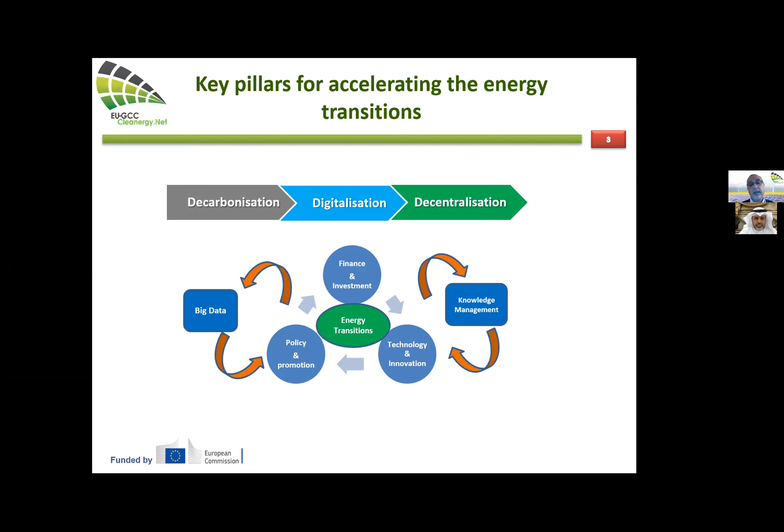On top of this, we have also to tackle the issue of data, the availability of data, and we are handling a lot of data coming from our projects, or all the facilities in energy and other sectors. Knowledge management is key also, as we have to learn and take note of all the changes, all the experiences, the failures and successes, and this is very important for the next generation.

For this energy transition, we need to also work on all the sectors of the economy, not only the power sector. So we have also the other sectors like transport, building, and industry that are consuming energy. And if we need to go with 100% renewables, we have to also transform that energy into clean energy.

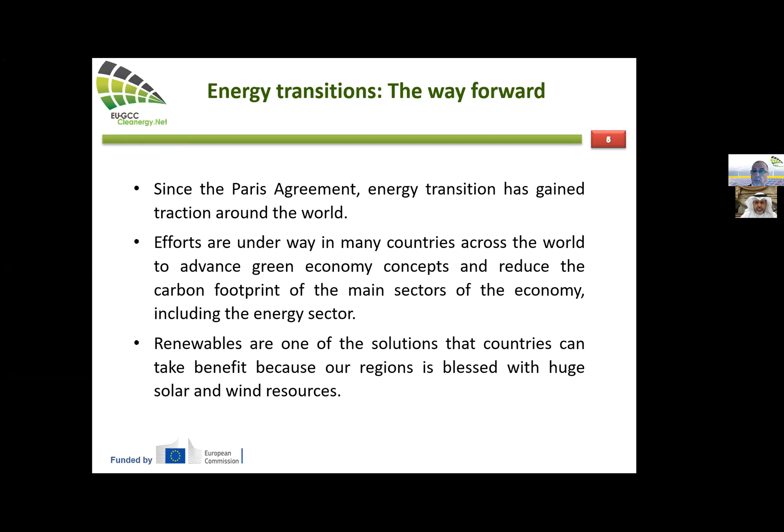So since the Paris Agreement, energy transitions have gained traction around the world. Efforts are underway in many countries in our MENA region, but also in Europe, in America, in Asia, to advance green economy, green concepts, and reduce the carbon footprint for the main sectors of the economy, including the energy or power sector.

Renewables are now one of the solutions that countries can take benefit from, because I'm sure that in any country or region, we can find solar energy, wind, or other renewable resources like geothermal or even waste.

Yes, but where we are now, in 2018, the fuel shares in the world total energy supply were dominated by fossil fuels, by oil, coal, and natural gas. Renewables, the share of renewables was 13.5%, including hydro, biofuels, waste, and unfortunately, solar, wind, and other resources are far behind, with just 2% share of renewables.

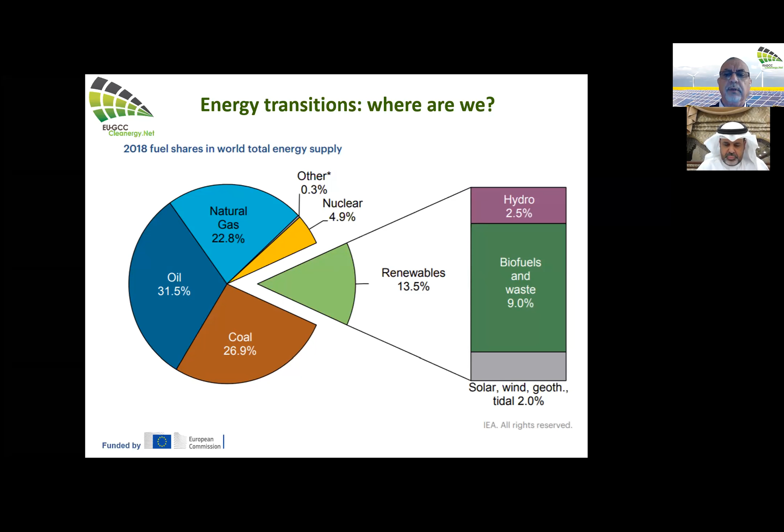As we will talk a lot about all the sectors, we have to know also where we are regarding the introduction of renewables in each sector. For residential, in 2018, the same reference year for me, it was 39%. In the electricity plant or power sector, it was 37.3%, industry 10%, and the others, more or less 5, 3, and 0.5 for heat plants, for example.

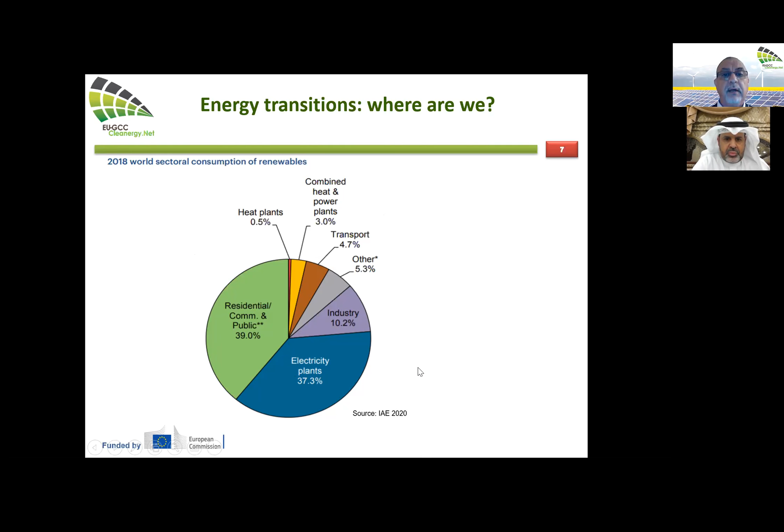That was, I think, the statistics from IEA from this year's report outlook. This is the renewable electricity cumulative capacity. In this graph, we can see that last year we reached 2.5 terawatts, 2,532 gigawatts exactly. So we can see that there is an increase in the cumulative capacity.

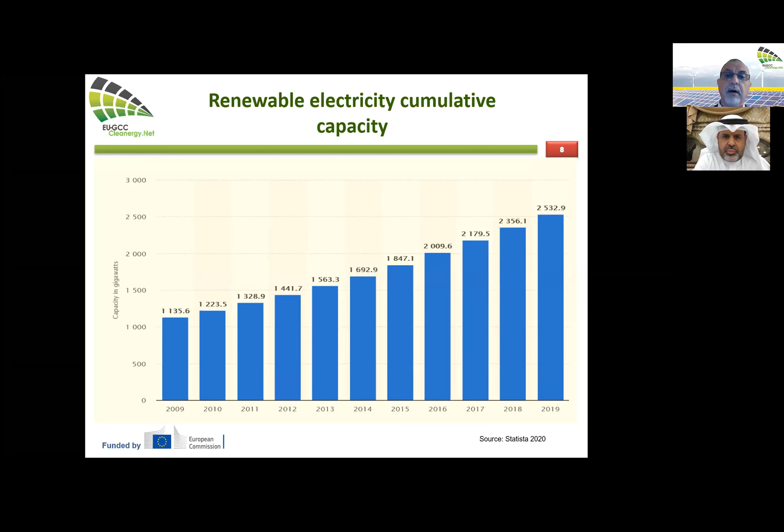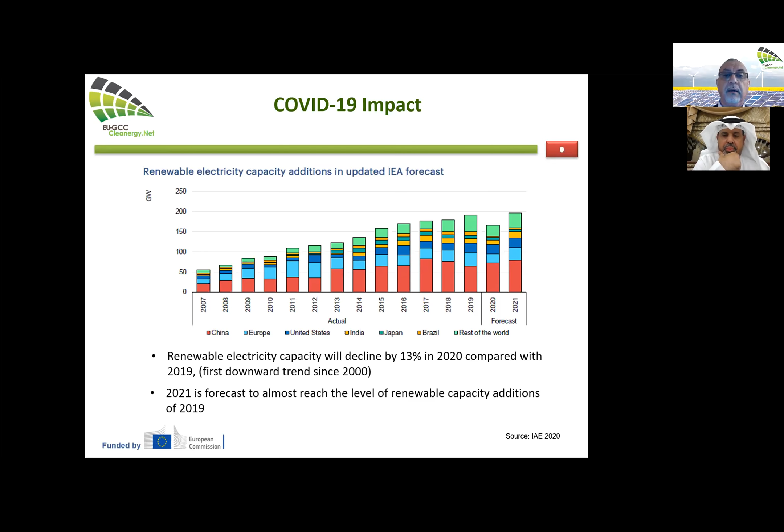But what about the impact of COVID? The impact is real, we can see it in this graph. That's the renewable energy electricity capacity, which declined by 13% in 2020 compared with 2019. This is unfortunately the first downward trend since 2000. For the forecast, as IEA also mentioned in its report, we will have the same level as 2019 next year. That is very important to highlight, because we have now some difficulties and challenges, but we have to tackle them, and we will succeed, inshallah.

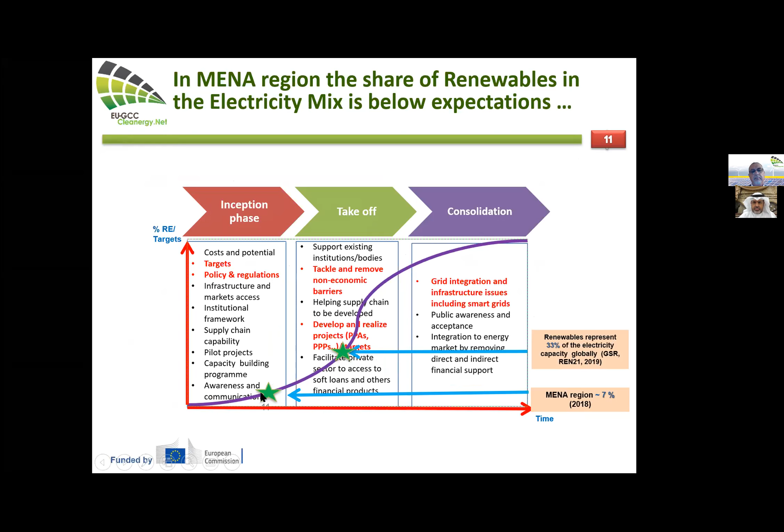So we are below expectations in the MENA region, just 7%, while globally it's roughly 33%, representing the percentage of electricity capacity. So the MENA region is still at the inception phase. There are some countries leading in the MENA region, like UAE, Morocco, Egypt, Jordan, Saudi, and others. But unfortunately others are just at the takeoff, the inception phase. That is why this percentage is very low.

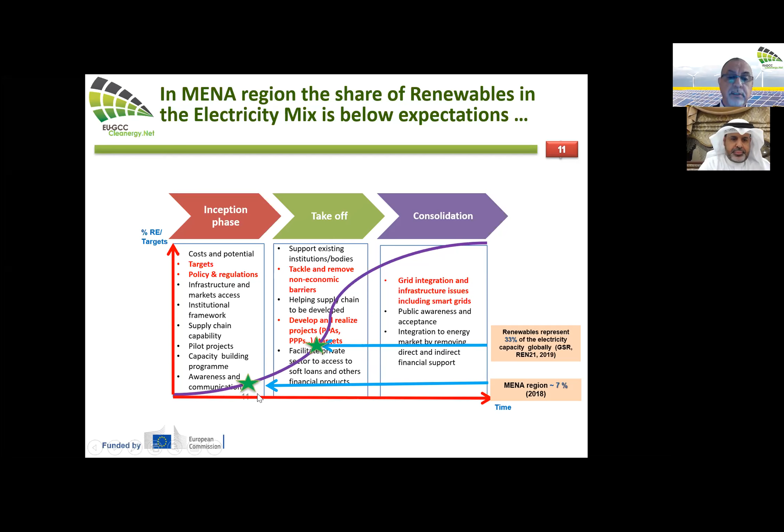Solar PV and wind are key drivers. This is the fact behind the fast growing share of renewables in electricity generation, but renewables' share in buildings for heating, cooling, rooftop, transportation, and industry sectors lags far behind its potential. That is why we have these weaknesses regarding the penetration of renewables in the global energy balance. Acceleration of renewables in all sectors will be needed to achieve the Paris Agreement. So why and how?

We have a lot of scenarios, and sometimes there are contradictions. For example, we have some ambitious scenarios, like Greenpeace, which is looking for 100% share of renewables. IRENA, for its transforming energy scenario, is looking for 65%, but for example in Shell Sky, they are just a little over 40%. So decision makers are a little hesitant, but in some cases they are looking to go beyond those scenarios, and we can do it if we have the right policy and the right resources.

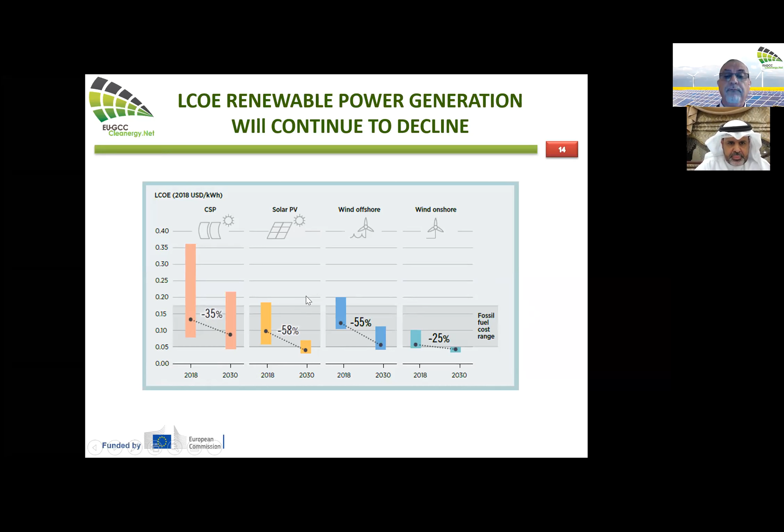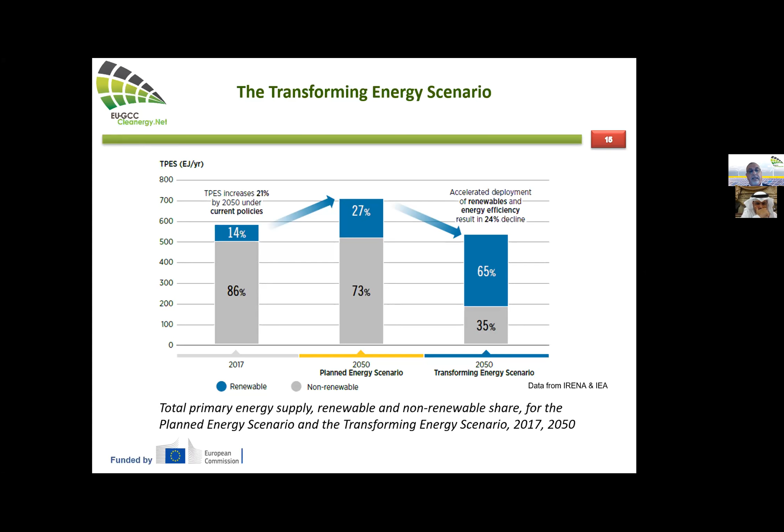The transforming energy scenario is from IRENA, where I come from - I was there for more than 6 years, and now I am working with the EU GCC network. I wanted to highlight this transforming energy scenario. The target is to reach 65% of renewables in the total primary energy supply. So that is the target, but how can we reach it?

The plan is to go through all sectors of the economy - transport, industry, building - and see how we can improve and scale up the penetration of renewables in industry and transport. Maybe we are struggling there; there's a lot of difficulty and challenges, and it's not easy to get renewables applied in those big sectors. For buildings it's easier - as my colleagues mentioned, with rooftop solar, we can also try to combine solar and energy efficiency, and move forward with buildings.

But these difficulties, as we can see here in this transforming energy scenario, we can use all the renewables, but definitely for the transport and industry sectors - as I saw in one of the webinars, IRENA and other stakeholders will revise this scenario because of these difficulties, and they have to be realistic.

On this, we cannot go 100% renewables in transport, for example. So we have to transform all the car fleet into electricity coming from renewables. I'm not sure that we can reach this.

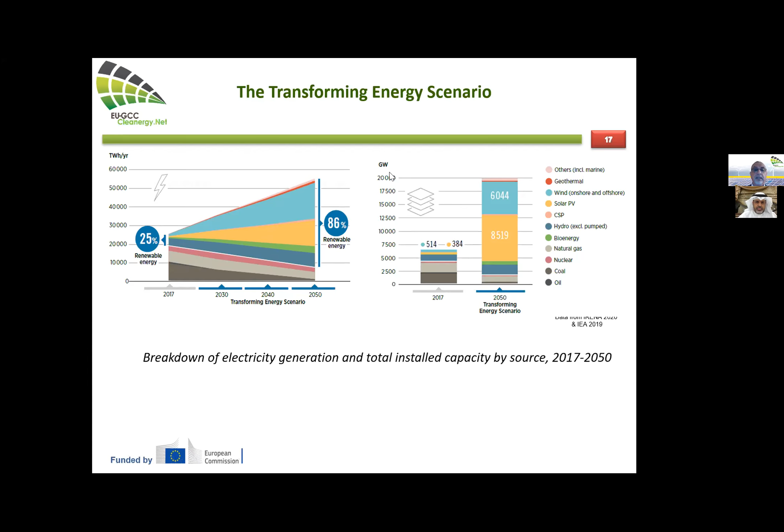So energy efficiency, energy storage, smart grids, and green hydrogen will become increasingly important in the future to tackle those challenges. We have a variety of technologies and concepts available that we can take benefit of. Energy efficiency with renewables are key drivers for the transition, as we can see in this scenario coming from IRENA also.

So with energy efficiency, we can go with 40% of GHG emissions reduction by 2050. As we know, energy efficiency has a lot of benefits in energy savings, in saving public budget. We can also gain in the industry on the cost. And that is for sure that energy efficiency will help the introduction of renewables.

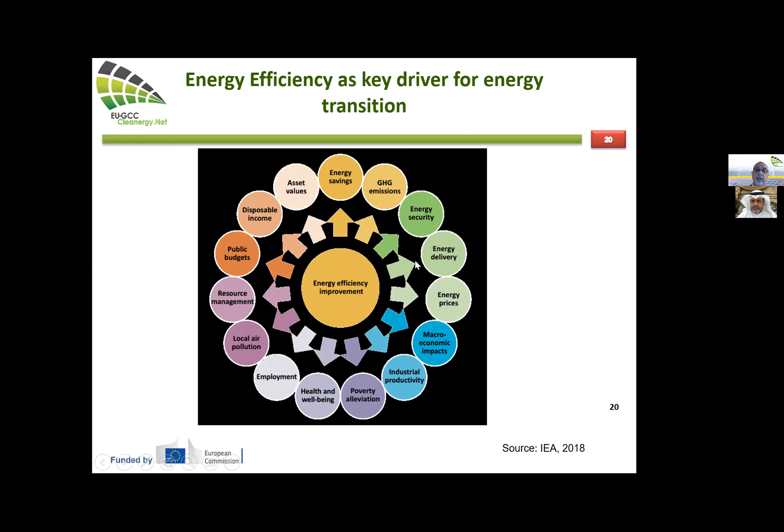We have this publication from IEA. It's very important for those looking for energy efficiency measures. I think one of the key messages is that they are also talking about buildings and industry, as we have to see how we can go forward with those, and also transport, aviation, shipping. So it will become increasingly important in the future.

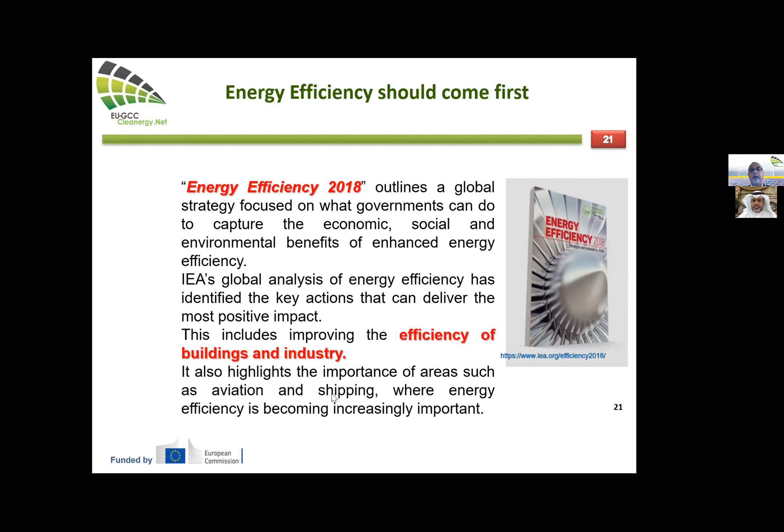Renewables and storage, one of the enablers. I think Robert already mentioned this with more details. But the electricity system is changing rapidly with the large-scale addition of renewables and storage technology, including pumping storage, or like Robert called it, kinetic energy storage. It includes also batteries, the lithium-ion batteries, making it well positioned to aid in integrating these variable resources while supporting grid reliability and resilience.

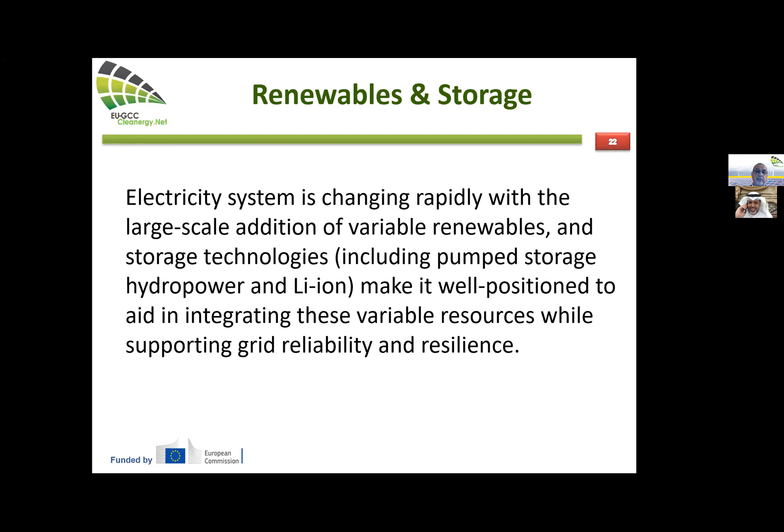So the lithium-ion cells are currently the best batteries for stabilizing the distribution grid because they combine high storage capacity with high charge and discharge. We have hydrogen coming as a solution for long-term storage. This is, I think, very important. And pumping storage, this is the cheapest option.

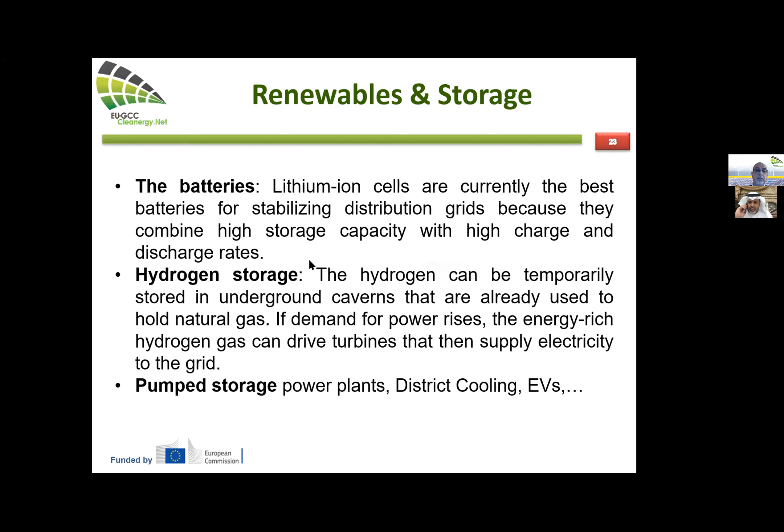As we can see here, for example, if we need long-term storage capacity, we can use hydrogen, but also pumping storage if we have the possibility, because I'm sure, for example, in Kuwait you don't have this option, and maybe in Saudi you have dams, you have a lot of surface water.

So for lithium-ion batteries, that is under 1 or 10 megawatt even. We can go as 10 megawatt, less than 10 megawatt we can use, but also the duration matters. For example, batteries are just for a few hours, while hydrogen, for example, we can have long-term storage, days, weeks, even months.

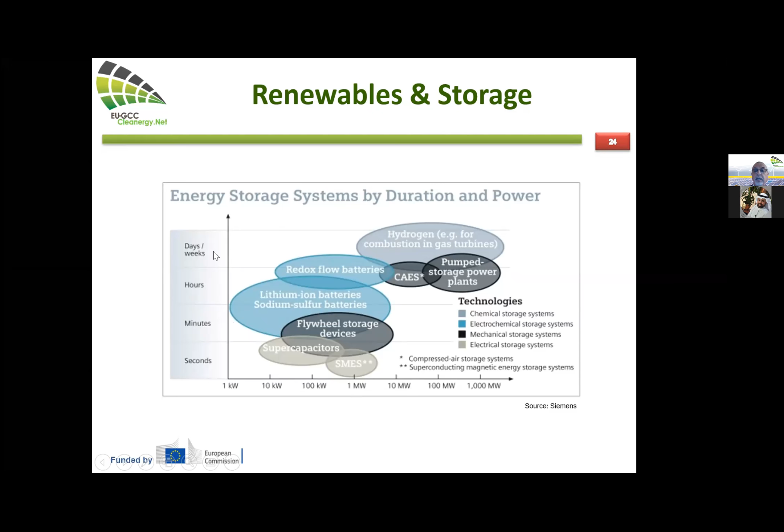So for renewables and storage, I think the market now is dominated by pumped storage hydro with 98%. And for batteries, we have this variety, but lithium-ion battery is dominating with 48%, and we have also the flywheels.

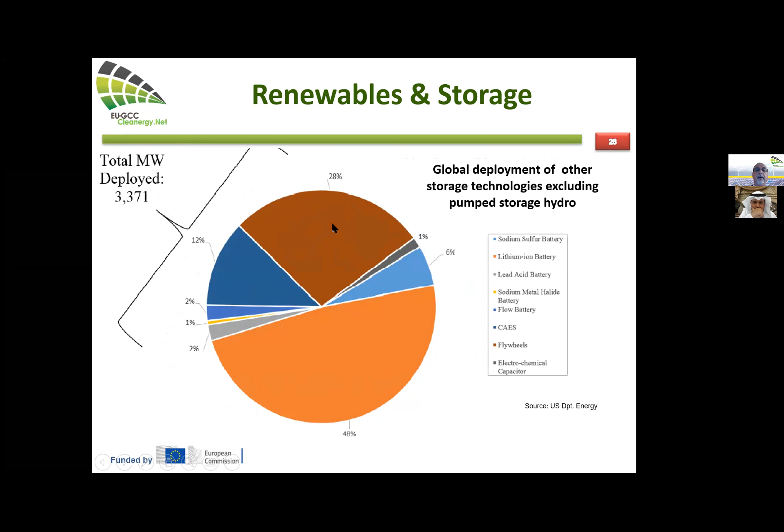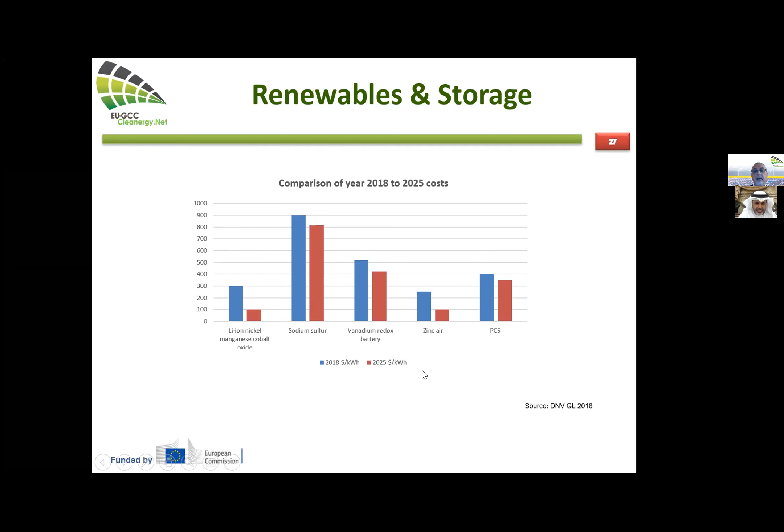So a smart grid, as I mentioned, is another enabler if we can use it to have more flexibility in the system. We can decentralize also all the resources. We can use direct power to users to reduce the losses, and of course with digitalization, because we are using smart meters and smart technology.

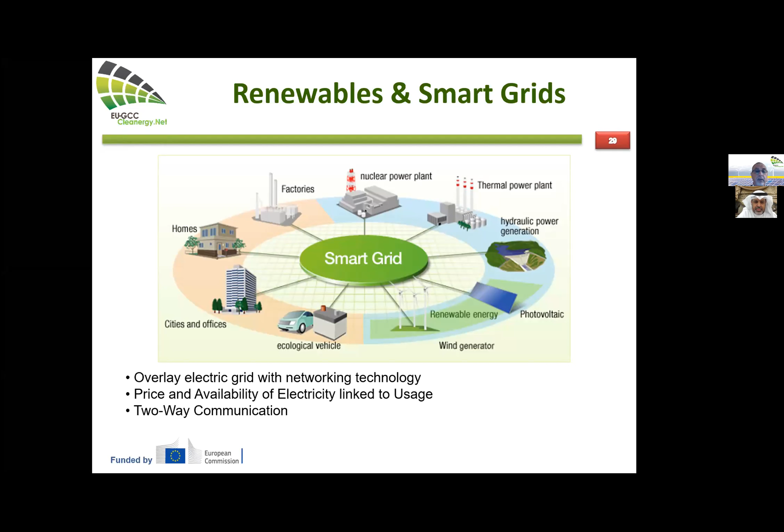So that is the enabler, and also the smart grid overlays with networking technology. It's a two-way communication, so we can have the availability of the electricity linked to usage, not only to the supply. So we can learn a lot from the consumer and see how we can optimize his consumption.

It enables a rapid and automated incident response. It makes frequency regulation easier for the power companies, and increases also the grid stability and power quality, as it also helps with load leveling.

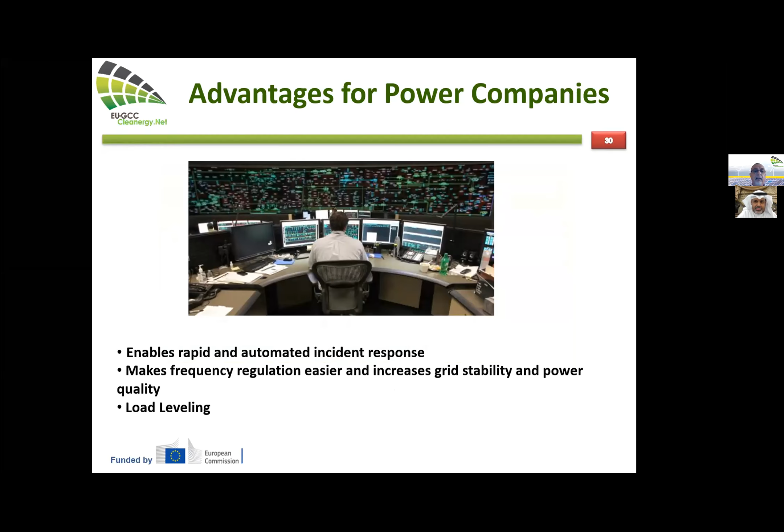Green hydrogen now, very quickly.

Yes, thank you, we have 1 minute. 1 minute, okay, I'm finished.

Green hydrogen will provide solutions that can apply to a number of sectors, including transportation, industry, and building.

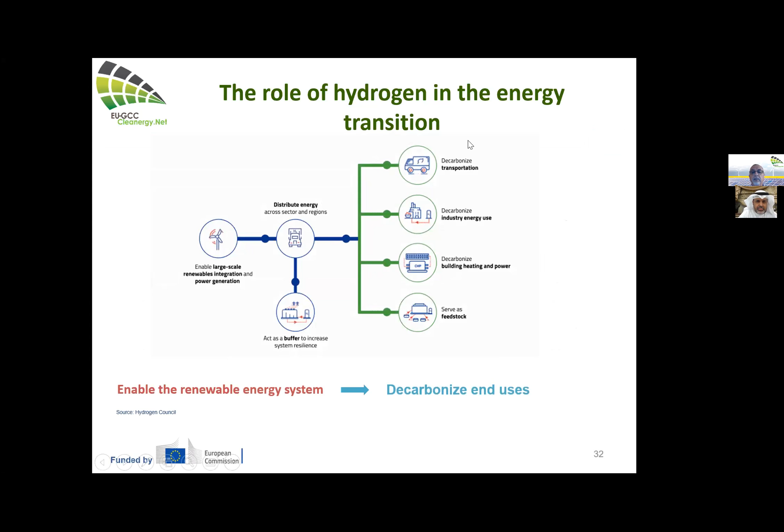And we can see that we have now cars, trucks, even railways that use hydrogen. We can use this green hydrogen coming from renewables in all the industry, and also as a feedstock. So it will help a lot to decarbonize all those.

The problem with hydrogen now is the cost, but if we can do more effort to improve the electrolyzer efficiency, and also have more operating hours, more than 3,000 hours, we can reach this 1.5 euros per kilogram.

A lot of benefits, and we see that in the region, for example, in Saudi Arabia, they are building this huge green city called Neom. It's the size of Belgium, is huge, and the investment is $500 billion. One of the aims of this mega project is to produce green hydrogen and ammonia for the local market, but also to export.

So that is the framework that I'm seeing that we can go with for the next decades. Renewables, yes, but we have to combine it with energy efficiency, green hydrogen, smart grid storage, and without a policy, without a framework and regulations, it will be tough to reach the targets.

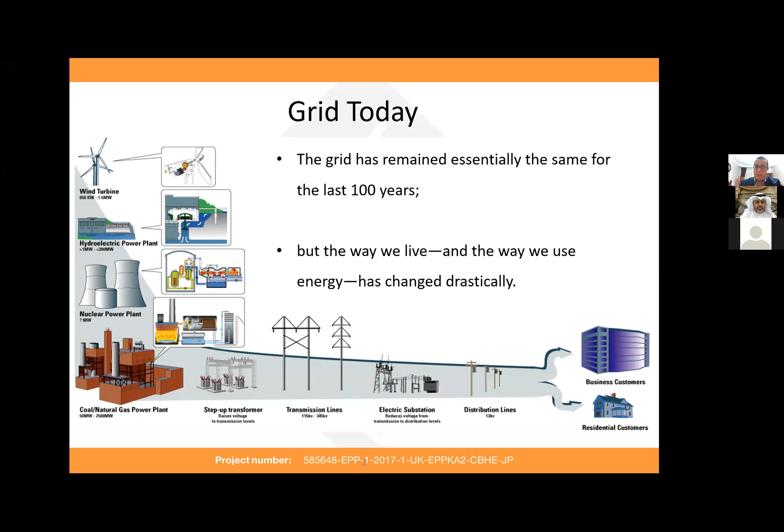So today, I will give an overview about the smart grid, so we can see how Dr. Mustapha mentioned the importance of this concept to the power sector in the future, and not only in the future, in these days also. So let me start by mentioning that the grid has remained similar in the last 100 years. But as we know, the integration of renewable energy resources and the way in which we live, which makes consumption increase every day, this was the main idea behind the concept of the smart grid, or the need for the smart grid.

So first of all, let me define what is the smart grid. There are many definitions for smart grid, but the common definition is: an electricity network which uses digital and other advanced technologies such as cybersecurity, secure communication technologies, automated and computer control systems in an integrated fashion to be able to monitor and intelligently and securely manage the transport of electricity from all generation sources to economically meet the varying electricity demand of end users.

So the definition here includes many factors. First of all, we are talking about the power stage in which we are now integrating new renewable energy resources into our grid. We also now have communication technologies to communicate between the distributed energy resources and the consumers, in which now they have a different definition for the consumer. It's called a prosumer, since now they are producing energy and they are consuming energy. So in smart grid, we are looking at the consumer as a prosumer.

Also, we have here the cybersecurity issue, since we have a communication and transmission for the data between the controllers and also the consumption and the control signals. So we need to secure our communication system.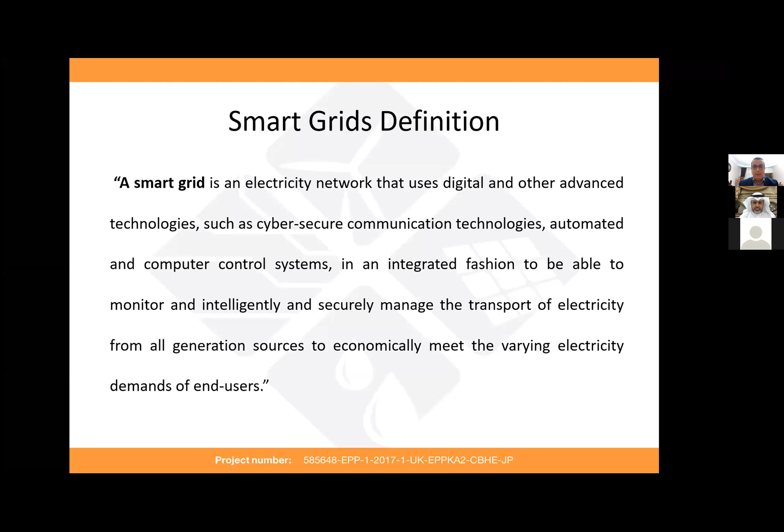Therefore, there's a new field called cybersecurity, which tries to handle the issues that can arise with the smart grid concept now and in the future.

So the main drivers behind the smart grid are the rapid increase in demand size due to overpopulation and increasing scope in the commercial and economic sectors.

Also, there are clear impacts of conventional power supplies on the atmosphere due to the emission of carbon dioxide. These gases become a serious problem, as we can see the carbon dioxide is increasing every year.

For example, between 2010 and 2018, it increased by around 13 gigatons. So this is the main driver behind the smart grid.

So the vision of the smart grid is to bring together the existing electrical infrastructure and the computer and communication networks that we have been calling by various names for years.

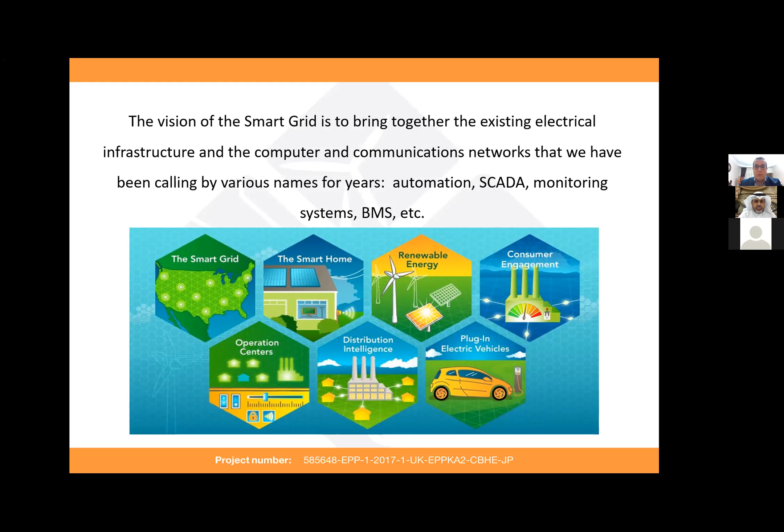So we have automation, SCADA, monitoring systems, and battery management systems, etc. All of these systems will work together to form the smart grid.

The communication network is, as we said, one of the important layers in the smart grid architecture.

We will take advantage of modern technologies like advanced sensors, communications, and advanced control devices to, in the end, distribute electricity more effectively all the way from the transmission to the customer appliances.

As Dr. Mustapha mentioned, the power flow here in the smart grid is not like the conventional one. We have a two-way power flow, from the customer to the grid and from the grid to the customers.

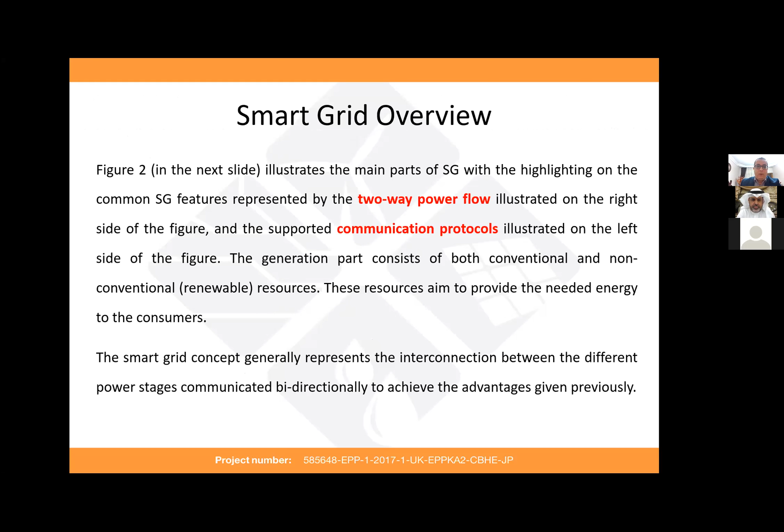We are always trying to make a balance between the generation and the demand. This is the main issue which always arises when we are discussing the smart grid concept.

As I said before, there are three stages in the smart grid: the power system, the information flow, and the power flow.

The power system can consist of many distributed energy resources, and also conventional ones, like fossil fuel resources.

The information flow uses different channels, depending on the geographical area and distribution of these distributed energy resources, and the distance between the assets.

For example, if we are talking about a small area, we will use the home area network to communicate between the assets and to integrate the components in the smart grid.

If we are talking about a larger area, we will use the neighborhood area network or the field area network. For example, if we are talking about a country, we will use the wide area network.

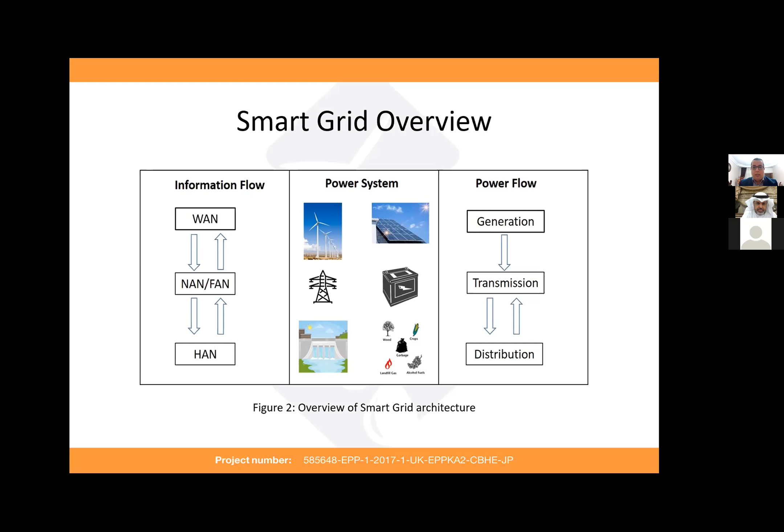For the power flow in the smart grid, it goes from generation to transmission, and here the two-way power flow is between the transmission and the distribution.

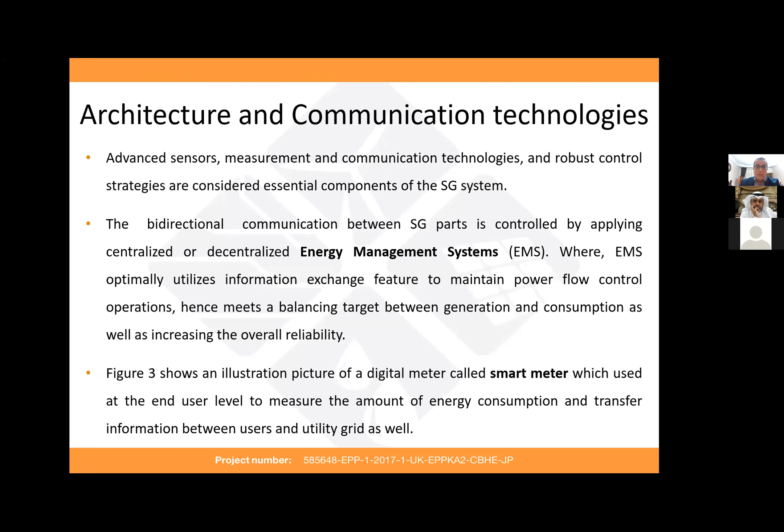As I said before, the architecture of the smart grid always consists of three layers. Without the smart meter, it's not possible to apply the concept of the smart grid.

The smart meters play an important role to monitor demand and also, in the future, to send control signals to appliances, for example in homes or factories, to control the assets inside the homes or factories.

This is always done in order to balance the generation and the demand on the grid.

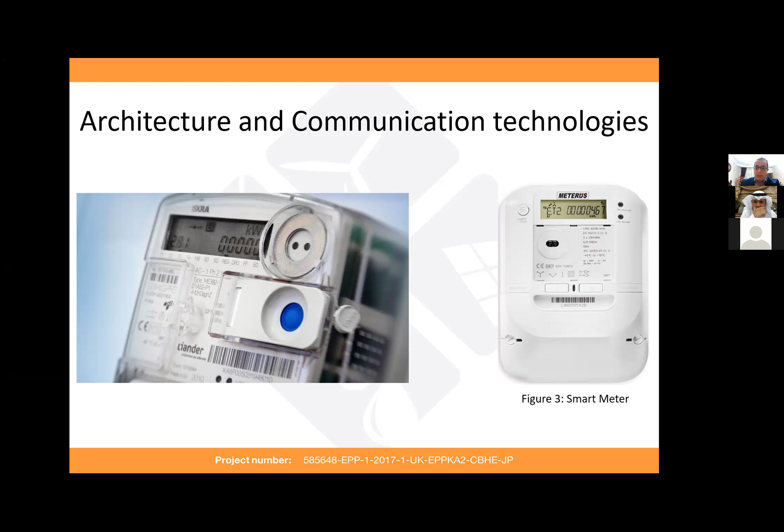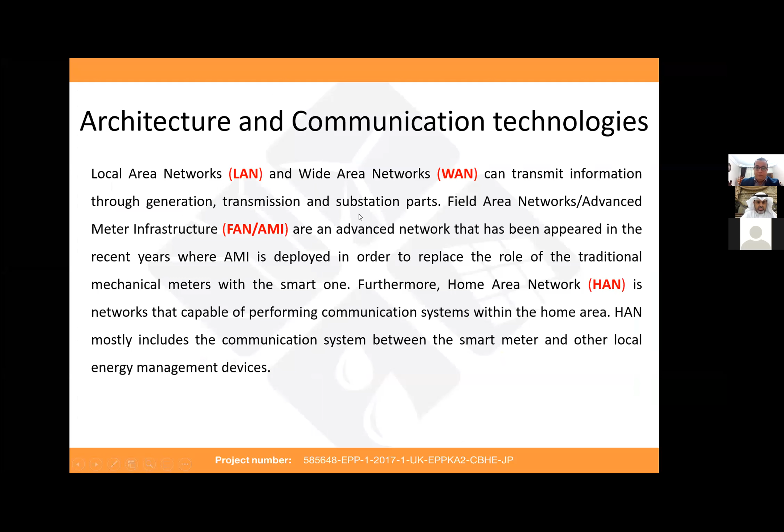As we said before, there are many channels which can be used as communication technologies in the smart grid, depending on the coverage area of these channels.

For example, GSM can be used for a data rate of 14.4 kilobits per second, with a coverage range from 1 kilometer to 10 kilometers.

While ZigBee technology supports a data rate of 250 kilobits per second, and the coverage area is from 30 to 50 meters.

I would like to mention the benefits of the smart grid for the consumers, for the environment, and for the industry. In general, we can summarize the benefits of the smart grid into four categories: environmental benefits, benefits for the consumers, benefits for the employees, and benefits for the investors.

If we start with the environmental benefits, which is one of the main drivers of the smart grid concept, the goal is to reduce carbon emissions and climate change. These benefits are achieved due to reduction in losses and the integration of renewable energy resources. The use of electric vehicles will also result in reducing carbon emissions.

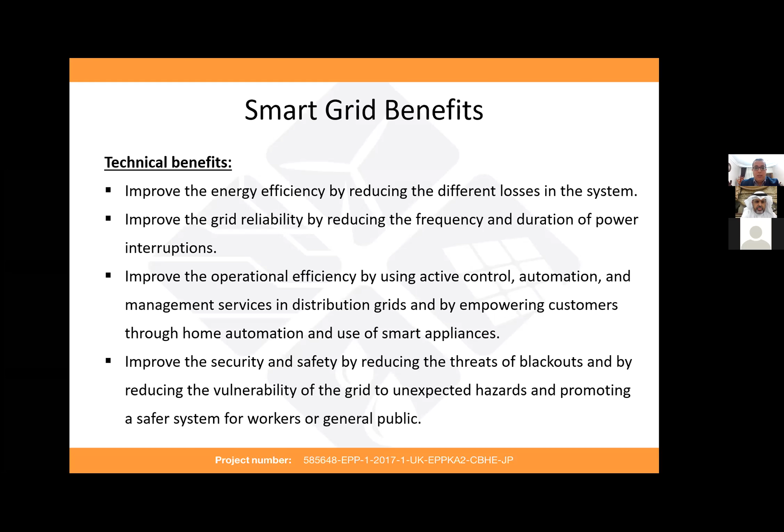We are also improving operational efficiency by using active control, automation, and management services. Also, we are improving security and safety by reducing the threats of blackouts and reducing the vulnerability of the grid to unexpected hazards.

And also improving the quality of the supply by maintaining the voltage magnitude within statutory limits, and also improving the access to the grid for the distributed energy resources and the electric vehicles.

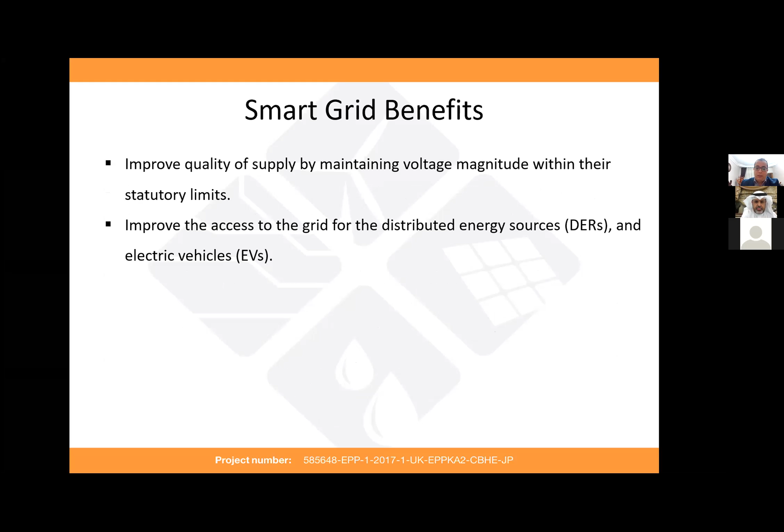So the smart grid must have these components at the end. We must have energy storage devices, mainly if we are talking about the microgrid level, specifically the islanded microgrid, which refers to some area that is not connected to the grid. In this area, we will supply power from renewable energy resources, so it's not possible to compensate for the reduction of generation using the power grid. Then we need to use energy storage devices.

We have local power generation, the concepts of digital sensors and controls, real-time data, real-time price signals, broadband communications, smart homes, smart buildings, and electric transportation. All of these components will form the smart grid.

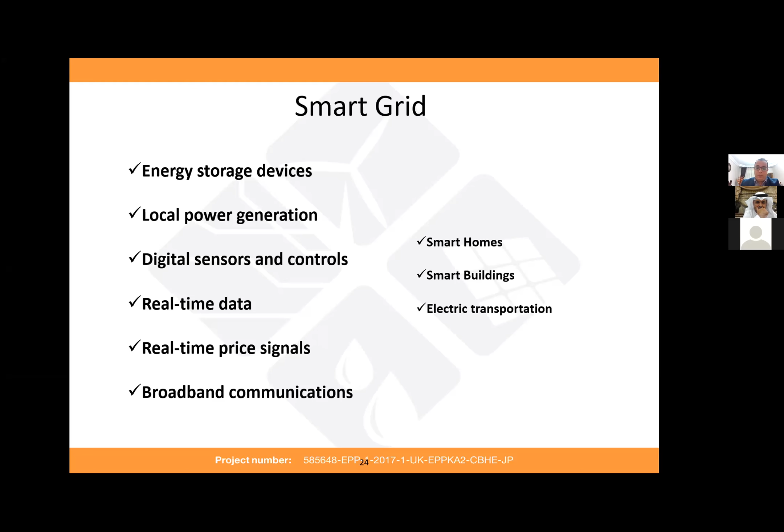So here again, there's a movement to make the energy grid smart, which means we need to add layers of intelligence to the conventional grid. We need to make multi-way communication in order to make our grid able to be self-healing, self-balancing, and self-monitoring.

Self-healing, we explained before: for example, if there's a blackout in some area, it can be solved by transferring energy from a close-by microgrid, which can transmit the excess energy to this area.

And we have self-balancing, for example, if there is an excess in the consumption or in the demand. Here we can make the balance by increasing the generation or reducing the load. So we always need to make a balance or a management between the demand side and the generation side.

And also we have self-monitoring. We have a controller and meters everywhere in the smart grid, so we will be able to detect errors before they happen and also to monitor the situation in our grid.

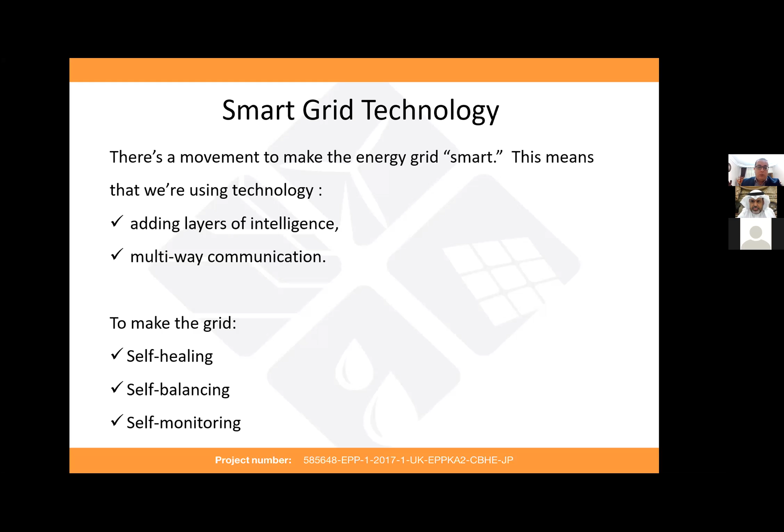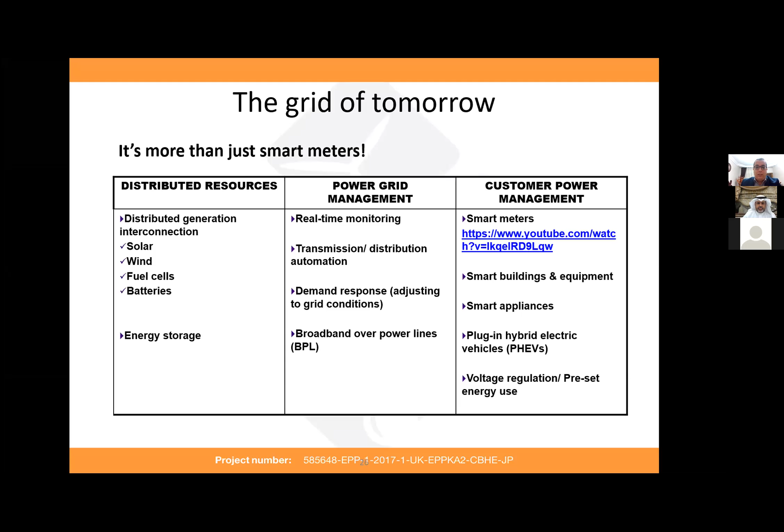So it's not just smart meters. The smart grid includes real-time monitoring, transmission and distribution automation, demand response, broadband over power lines, and integration of renewable energy resources. It also includes energy storage, and smart buildings and equipment. All of these ideas must be included in our grid to be called a smart grid.

So what's the difference between the current situation of our grid and the future smart grid? For example, the utility doesn't know when power is used. With the smart grid, utilities will offer lower rates for using power during off-peak times.

For example, if you want to use the washing machine at home, if it's in the middle of the day, the prices will be very high. So you will not use it if you know that rates will be cheaper in the evening. This is one of the options for load management in the future smart grid concept.

So here we can move— for example, when we get a large blackout, the grid will automatically create fire breaks fast enough to stop them, because it can predict faults before they happen due to the measurements we have everywhere in our grid.

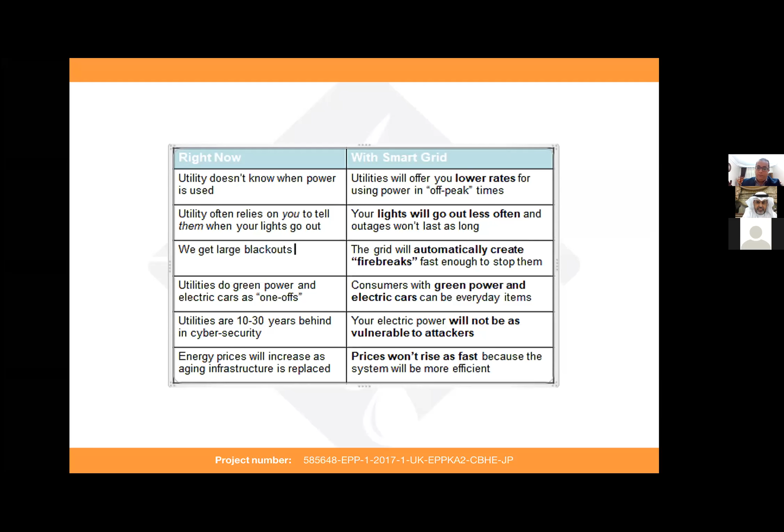There are many points, I cannot mention all of them here due to time limitation. So again, the smart grid city must involve the entire energy pathway from the power source to the home and all points in between. And it's rich in IT.

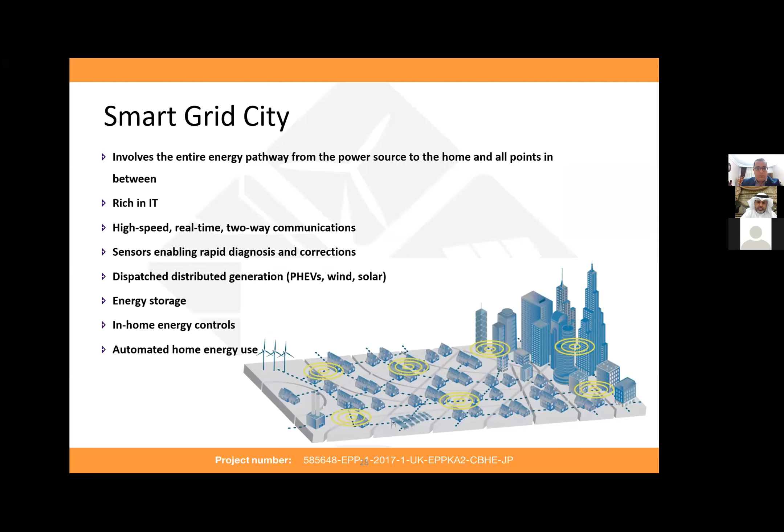There's high-speed real-time two-way communications. We have sensors enabling rapid diagnosis and corrections. We have energy storage, and we have automated home energy use. So this is the main idea about the smart grid.

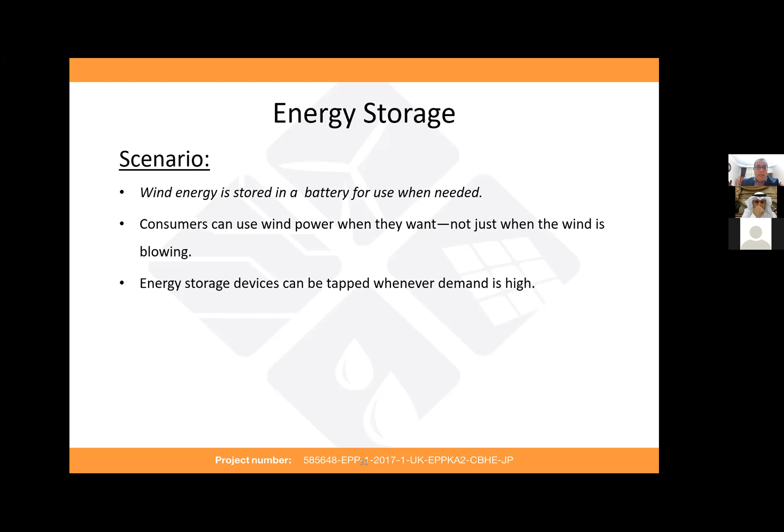For example, if we are talking about energy storage, we will use the energy storage for wind energy to store it for a time in which we will use this power in our grid. So the consumer can use wind power when they want, not just when the wind is blowing. And energy storage devices can be tapped whenever demand is high.

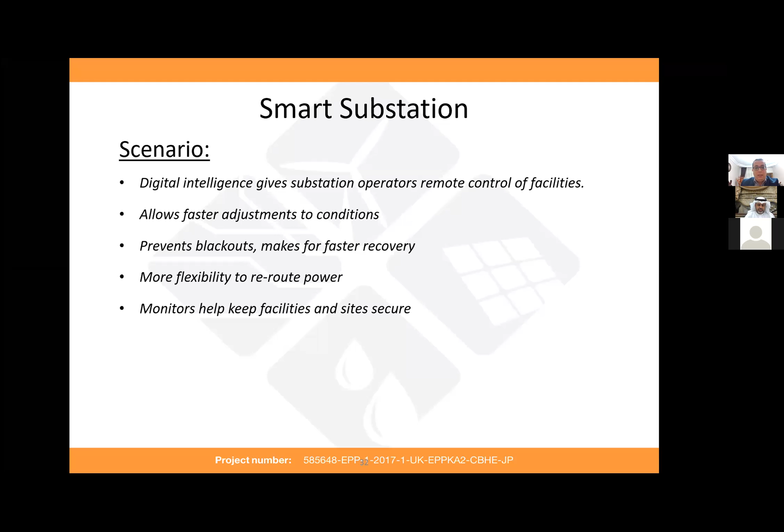For example, if we are talking about smart substations, the scenario is that digital intelligence gives substation operators remote control of facilities, which allows faster adjustment to conditions, prevents blackouts, and makes for faster recovery. We have more flexibility to reroute power. We also have the ability to monitor, which helps keep facilities and sites secure.

There are many different scenarios which we can share via slides with the attendees if they are interested. So finally, if we're talking about smart houses, in the future they will include controllers.

You can control it as a person who lives in this house, or even the company will also have the power in the future to control the load by disconnecting some loads if there is a lack of generation in contrast to the demand side. And also these devices will be connected to the internet.

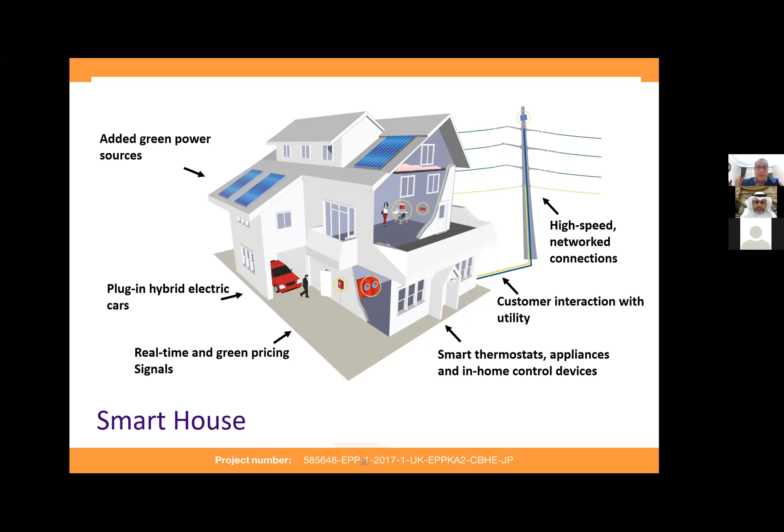As we know, it's the revolution of the IoT, and it's the era of Industry 4.0. So all of the components will be connected to the internet, which will also ease the task of the smart grid concept.

Also, it's important to mention the plug-in hybrid electric vehicles and electric vehicles, which will play an important role in the smart grid concept due to the use of their batteries for energy storage.

For example, if you have energy stored in your car battery and you want to sell this energy, you can sell it.

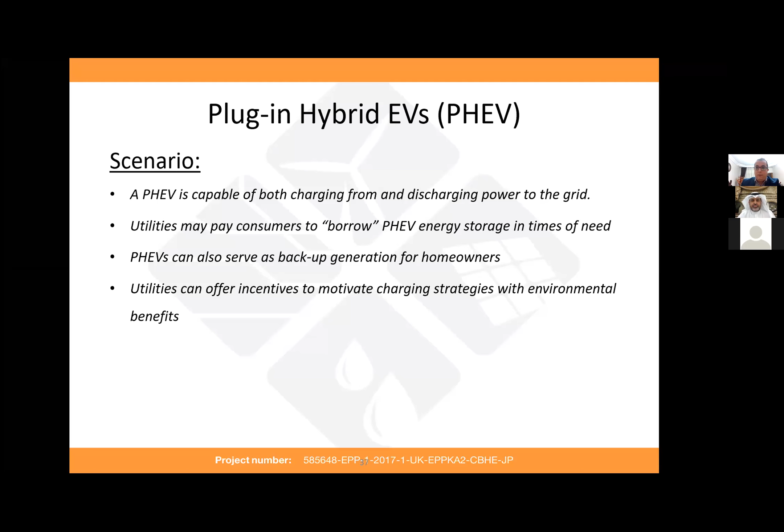So also they are depending on using this energy in the future to complete the operation of the smart grid concept. So let me say this was the main things I wanted to mention quickly as an overview for the smart grid concept. So thank you all for listening, and if you have any questions, I'm happy to answer. Thank you very much.

Thank you, Dr. Hani, for your presentation, and you are doing good time management for that. We appreciate it. Now you are talking about the smart grid. Maybe people think it is alternative now, but in the future it's going to be necessary for countries to get better management for electricity, and also for the evolution of electrical vehicles. We have to manage that, and we can't get advantage of it without having the smart grid in our network. Let's say in our area it's the future, but in Europe they already started applying this concept.

Yes, and especially the load management. I was in Glasgow, Scotland, and they already have the smart meters, and they are doing some incentives for load management. If you shift your load, you will get better tariffs, and I hope we can reach that in our countries soon, inshallah. Thank you. Especially this country, they set a target, for example, with zero net carbon by 2030 or 2050. Right, yeah, this will also accelerate the smart grid concept. Thank you very much.

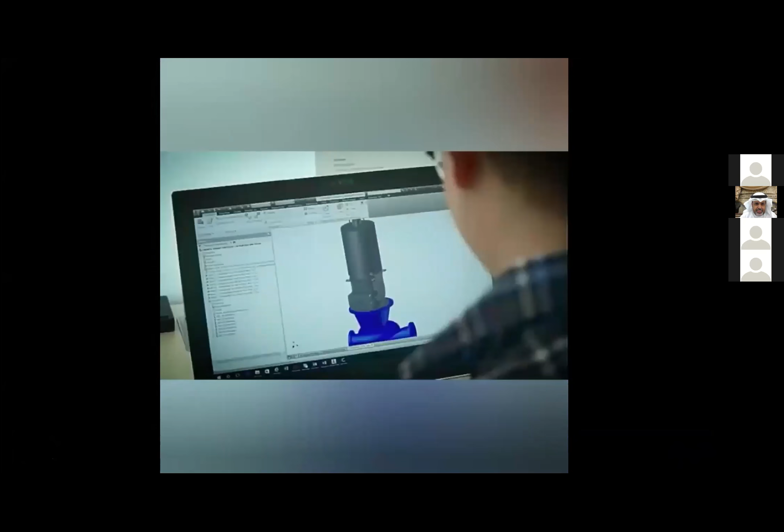Maybe there is no sound, I think. There is no sound, yes? Yeah. No sound, one second, I think there is a way to connect your computer sound to enable the sound. I'm not sure how, okay, give me one second. I just get my secretary to do that. So Mr. Salem, I'm going to explain to you what it is, because I'm having a bit of difficulty getting the sound connected.

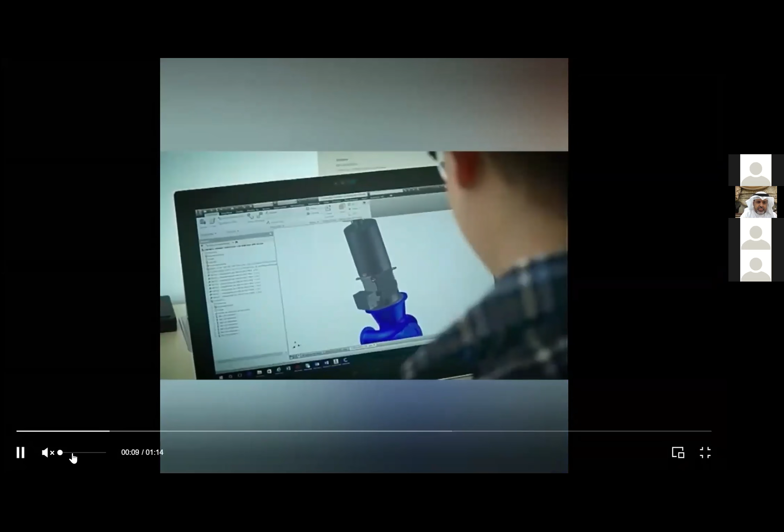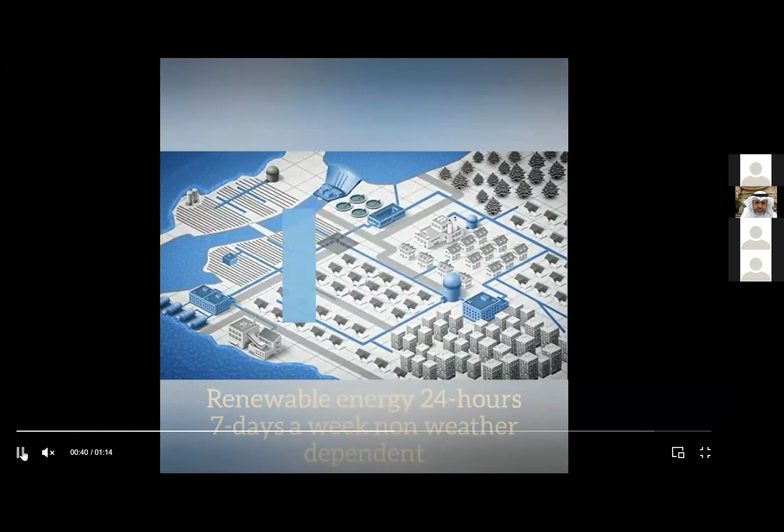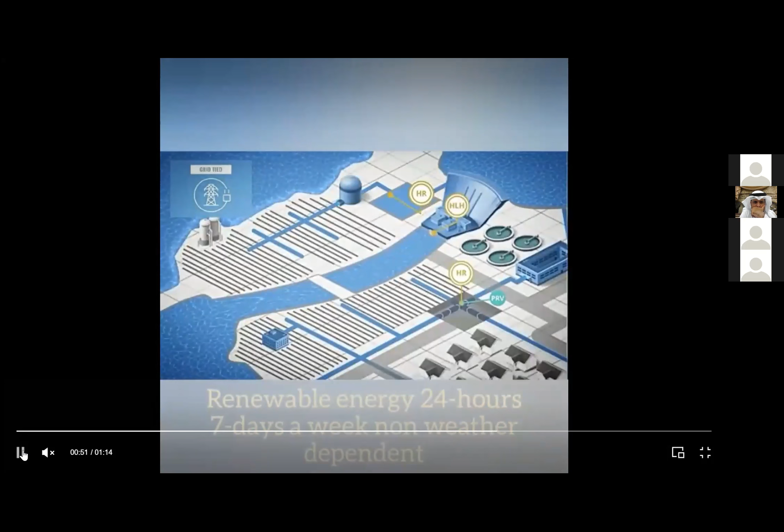So, can you hear me, Mr. Salem? Yes, I can hear you. Yeah, it's very, yes.

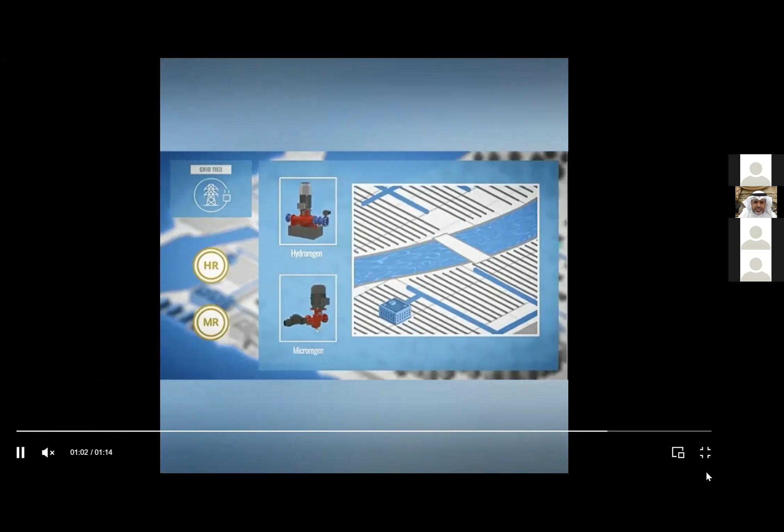So I'm going to show you some of our products that we've done.

One of them is CSP, water purification and aquaponics system. We integrated—you need to switch the screen share to the presentation. Give me one second, sorry about that. Yeah, now we can see it.

So this is our products. One of them, the first one, is CSP, water purification and aquaponics system. Everybody's familiar with CSP, but what we did here is we have water purification—we are converting seawater to pure water, and we are using it in agricultural, and we are using aquaponics. Aquaponics is basically hydroponics connected with fish farming and hydroponics together.

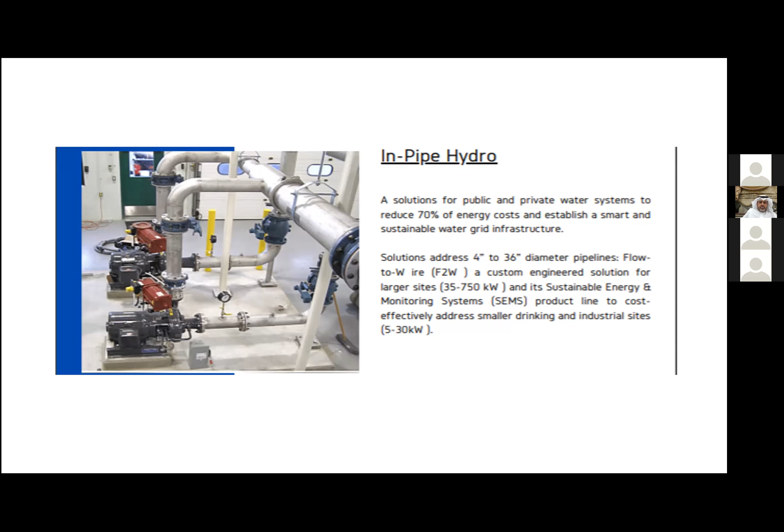It's called F2W, flow to wire. So basically, we can generate 750 kilowatts from the flow of the water and the pressure, and this energy could be used at the factory, or you can sell it to the grid. We have two options—we can install them, or we can rent them to water factories. This is an amazing idea because it's non-weather dependent, and you're talking about green energy 24 hours, 7 days a week. It's very different and unique.

Basically, that's what In-Pipe Hydro is. We also, everybody's familiar with geothermal as well—we provide geothermal energy, we provide solar, but this product is very different and unique.

Mr. Omar: You say it can produce 50 to 700 kilowatts—can you go back to the slide? Response: Yes, no problem, I'll go back and show you. So for large sites, you're talking from 35 kilowatts to 750 kilowatts.

That's almost a megawatt, and you can custom engineer a solution for large sites. For small sites, we're talking about 5 kilowatts to 30 kilowatts. This is for diameters around 4-inch to 36-inch. That's right, whenever it's a standard pipe, those are the standard sizes for pipes usually used worldwide.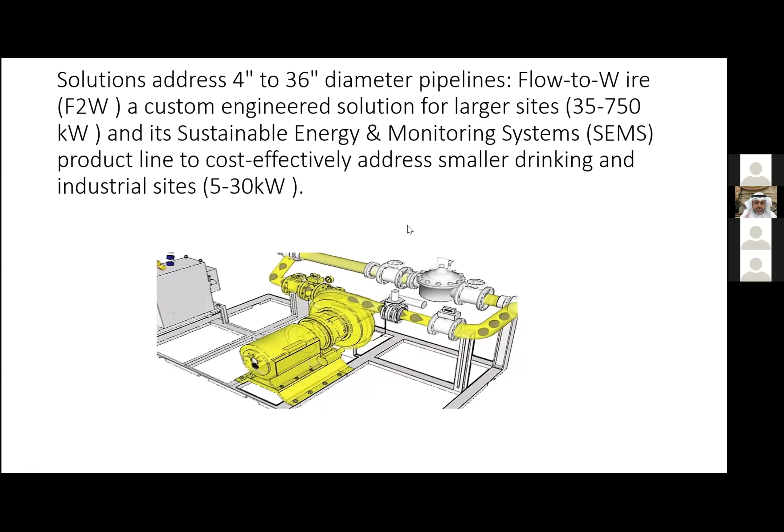If we have large diameter pipelines, like 36-inch, we can produce 750 kilowatts an hour, right? That's right. And this is using some turbine, like a vertical axis turbine, right? We are using pressure, and we are also using our generator as well.

It's an attachment instead of PRVs, pressure reducing valves, and we replace them with our generator. We're converting water flow and water pressure—we are using the water flow and the water pressure as well. And producing the water pressure, how did you produce it? How do we produce it—sorry, can you say that again?

The water pressure, how did you produce it? By using some valves and some techniques on that. To increase the pressure? Well, yes—basically our generator, you know, if I go back to this...

So we are using basically the flow of the water. We let it come into our generator, and we generate electricity from that, using the pressure to generate renewable energy. You already send the water to the public, and a lot of people aren't taking advantage of this, and it's 24 hours. We all know the biggest cost for water is energy, so what we did here is generate energy from the water, from the flow and the pressure.

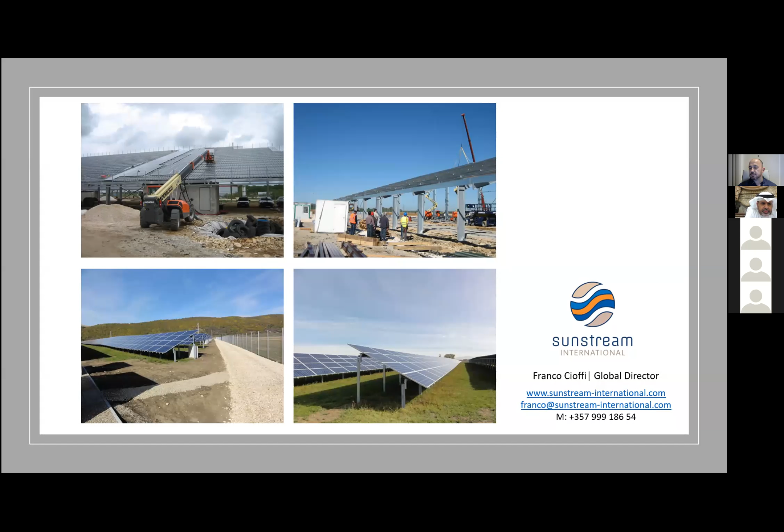In order to provide a better solution than the rooftop and classic ground-mounted systems we installed in the past, we at Sunstream decided to create a new world of autonomous mobile plug-and-play solar solutions that would allow faster installation times, improved mobility, and reduced labor force.

All of our solutions have the same DNA, really. They are fully pre-equipped and wired, and they come with a control room that operates in the actual container that the product is delivered in. They are intelligent systems that can be installed in a few hours. Some of our products can be installed in only a few hours, to a maximum of maybe a few days, depending on how many kilowatts you can install.

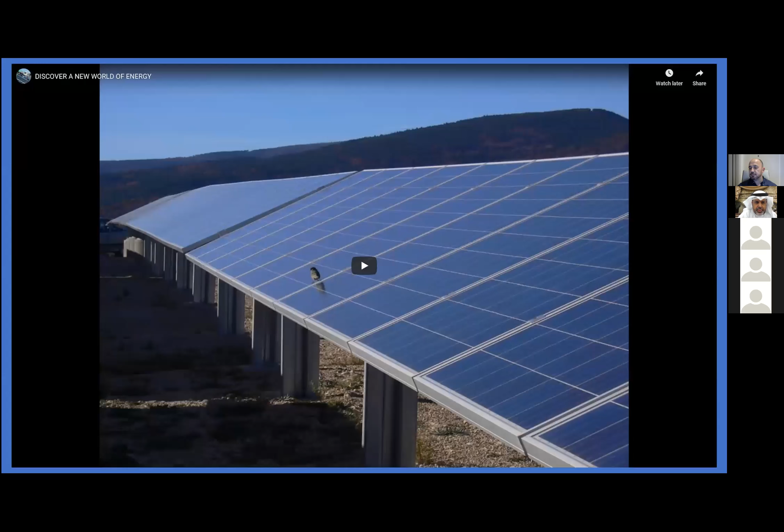I'm now just going to show you a video, which is our company video, and I think it showcases our products really well. It gives you an idea of what we've created over the past 6 years, and these can be used for on or off-grid locations. It does come with music, so if you don't hear it, let me know. I think I switched on the sound, so it should work. But please let me know if it doesn't come through.

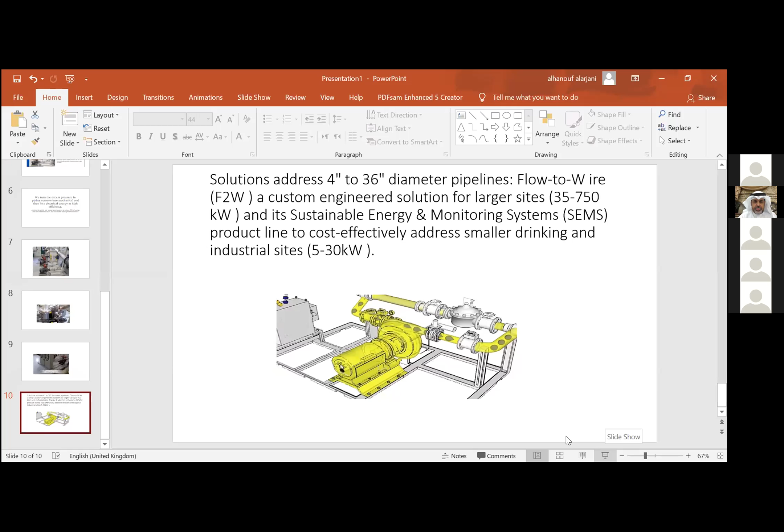Okay, so you are controlling the pressure, so there is no worry about damaging the pipes. Absolutely. I mean, companies already spend millions of dollars just to get rid of that problem. So we are replacing this valve with our generator to harness the pressure and convert it to renewable energy. And also we are generating energy from the water flow in the pipes, and it's non-weather dependent. You're talking 24 hours a day, renewable energy. It's very, very different and very effective.

I worked with a lot of products in the past. I dealt with geothermal, I dealt with solar. I have a lot of projects in America and Africa, even in the Middle East. But this product, from all my experience, is the solution, to be honest, because the biggest cost for water is energy. You're talking about generating renewable energy from the pipes that already send the water to the public, so it's an attachment, a replacement, not a big deal.

And we already implemented this, just to clarify, because earlier on I couldn't really put my presentation. We already installed this in California, and we already installed this in Europe, in Ireland, and we did it in Kenya and Africa as well, and it was a successful project. So it's not a theory, it's been implemented and it's been tested.